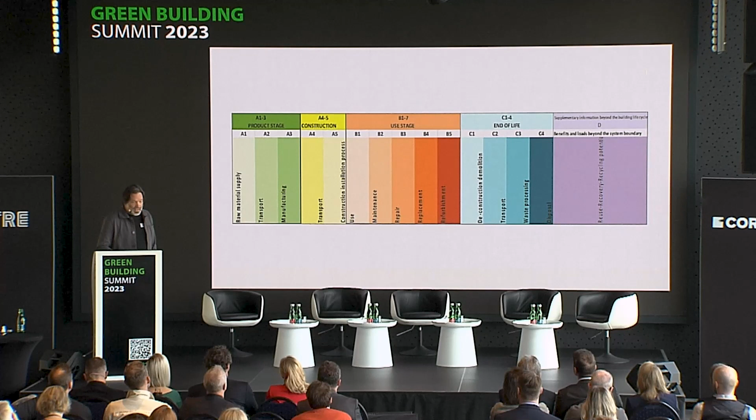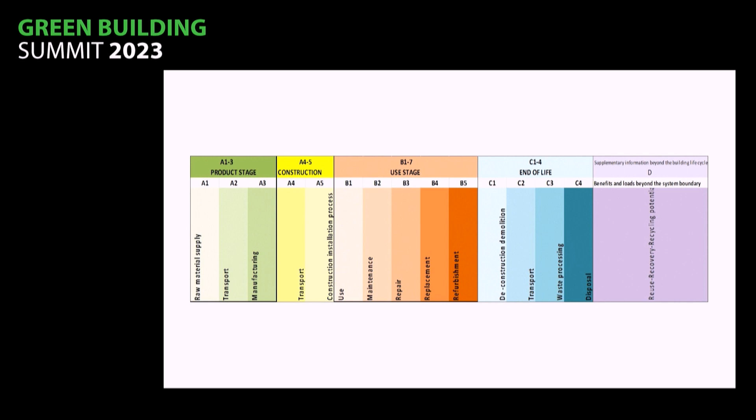You're probably aware that especially in Central Europe or Western Europe, in Austria, Germany, Switzerland, for the last 30 years we have been very good at calculating and improving the performance of our buildings in terms of operative energy consumption. So passive house buildings, really exceptional numbers with 25 centimeters of insulation material that is probably fossil-based, with constructions, with building services, mechanical ventilation services that eat up 30-35% of our building budgets just to improve this part, the use stage of the building.

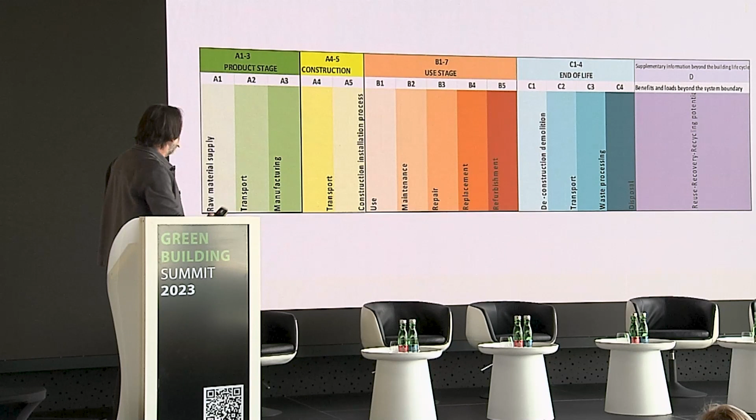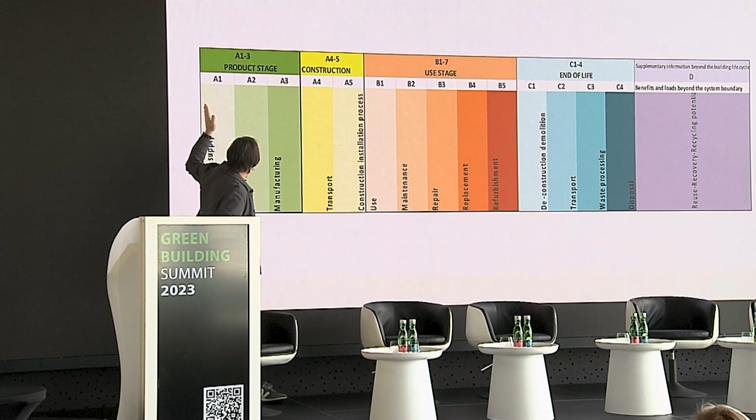We have fantastic numbers, but it's only a part of the picture. And what I really want to talk about today is what is happening before and after this use stage. Because in many construction projects, we see that this A1 to A5 stage, going all the way from raw material supply to transport, to manufacturing, again to transport to the construction site, and construction site installation, can easily eat up more than 50% of your total CO2 budget. Easily 50%. And widening the perspective of the calculation, not only to operational CO2 consumption, but to this whole life cycle, this is super important.

We got aware of this topic about 15 years ago. We tried to really understand what was necessary to address it, and like so often, it was actually refurbishment projects that were the first ones we tried to tackle this mathematical exercise of being truly CO2 negative in the whole life cycle. So these are a series of office buildings in an area close to Oslo, typical concrete slab office buildings from the 1970s, very poor facade quality, very low floor-to-ceiling height, all those situations we have to deal with when working with old building substance.

What we did, we stripped the building, we completely changed the ventilation system. We introduced, really challenging the code with this project, a very low-speed airflow system, so we don't have any ventilation ducts. The ventilation goes through this central open staircase. We have open floor plans, but of course we cannot provide fresh air to individual cell offices, which has an impact not only on the design of the building but also on the culture of working together in these sort of buildings. So you have to accept that with open floor plans, you can have more innovative ventilation strategies.

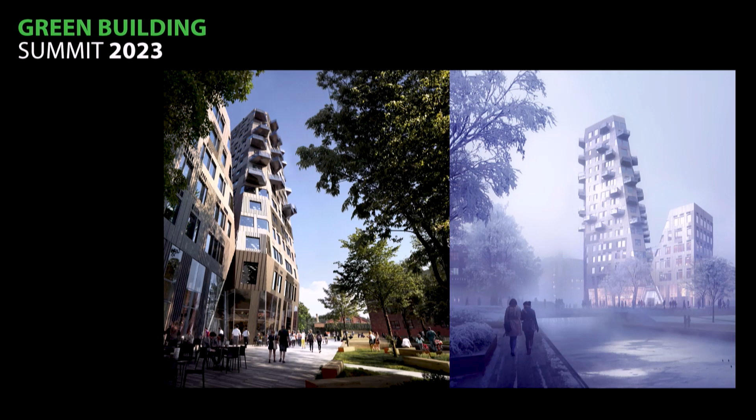Another project from Norway that I would like to make you aware of is called Gullhaugtorg. It's a mixed-use developer project. We have 2 stories of retail and gastronomy, 4 stories of office use, and then residential on top.

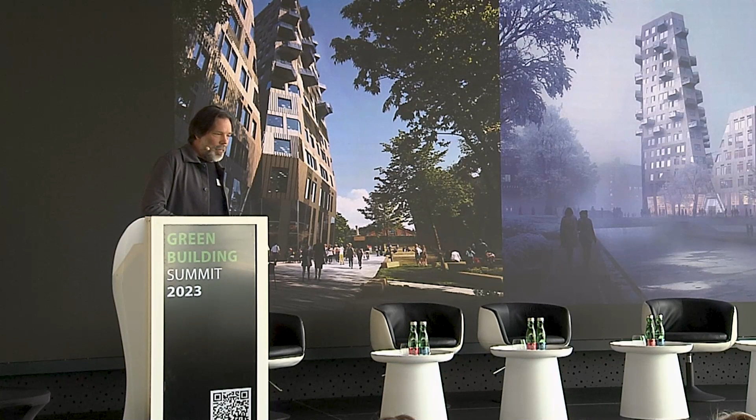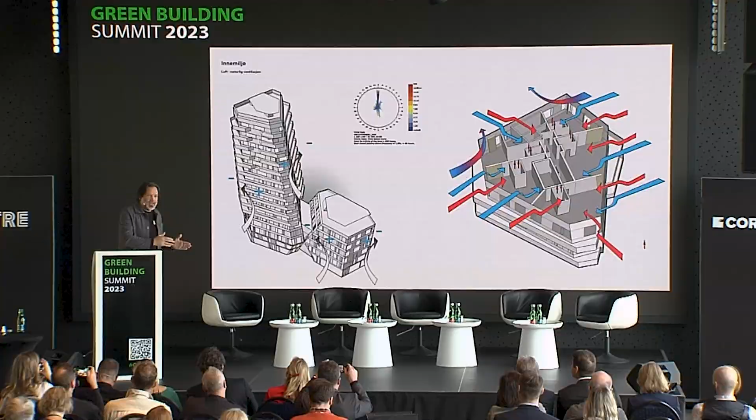What's interesting about this building, similarly to the renovation project for the first powerhouse, is that we're working only with natural ventilation. This is an exercise you need to investigate closely. Do you have energy losses through the use of only natural ventilation? Any building mechanics engineer will tell you, oh, you have these energy losses in winter. But you have to do the whole calculation, and sometimes ventilation systems consume energy. You increase the floor-to-ceiling height, you increase the building volume. So there's a lot of parameters that go into this calculation.

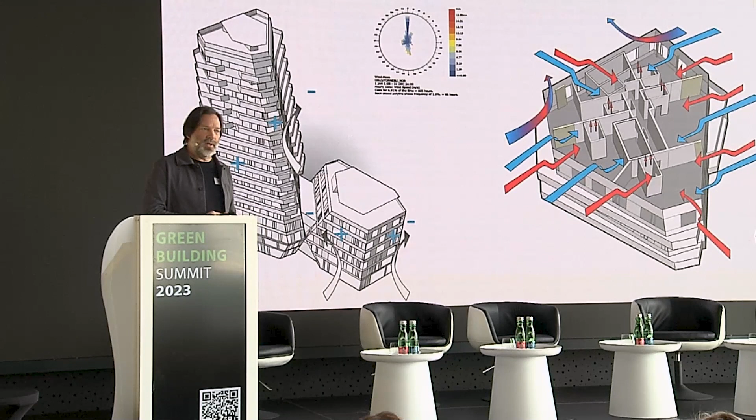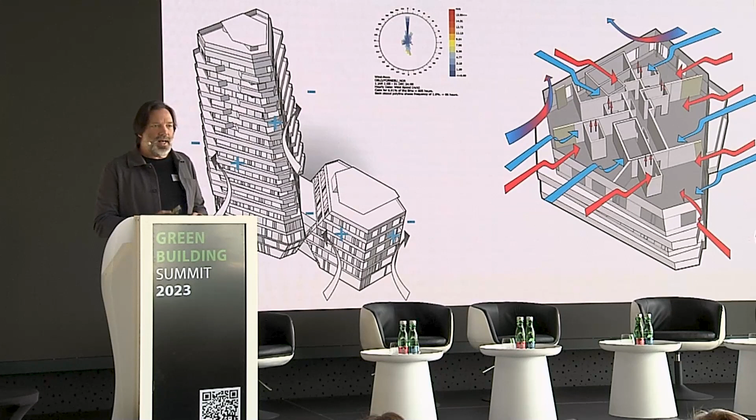What we did in this project is try to use the drivers from the environmental context, the situation of the wind on this specific site and the solar gains present, to influence the building geometry. Similarly to the Powerhouse Telemark project where the size of the roof determined the geometry, here it's the wind direction that helps us naturally ventilate the building and creates this kind of awkward hexagonal shape on the building footprint, again to create ventilation improvements.

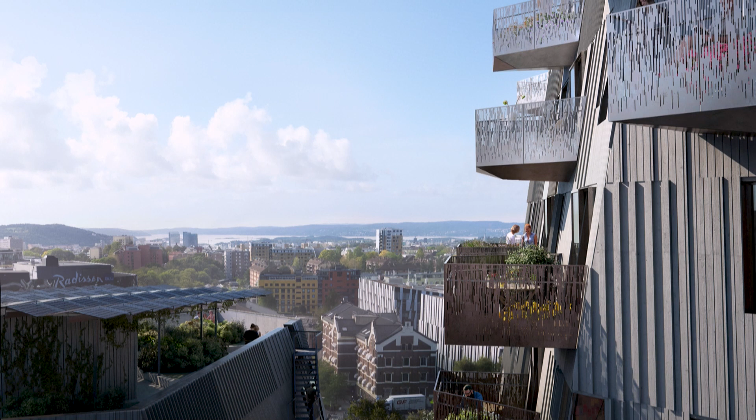For this building, the structure is not in timber because in Norway currently you cannot build a tower in timber. This is really an interesting situation. 60 kilometers from here in Aspern, we have a tower 80 meters tall built in timber, which is currently totally unthinkable here in Slovakia. I don't know why this fire burned differently in Austria than it does here in Slovakia. What is the reason for that?

Also here in Norway, it was not allowed to use timber for the main structure of the building, but for the facade we have a timber solution. And of course, like in the earlier projects, it's not only about the functionality of the building, it's also about the social context it provides. It's now under construction and will be opened this fall.

I'm going to show you another little prototype. That's why we call the lecture Creating Prototypes, because in smaller projects with private clients who dare to challenge the code, you can have a qualified discussion and really ask questions that go beyond the norm. This is an office building for a thriving company close to Innsbruck, where we have our Austrian branch office. An office space for 65 employees, a 4-story building, completely constructed in timber. As an introduction, I'll show you a little video.

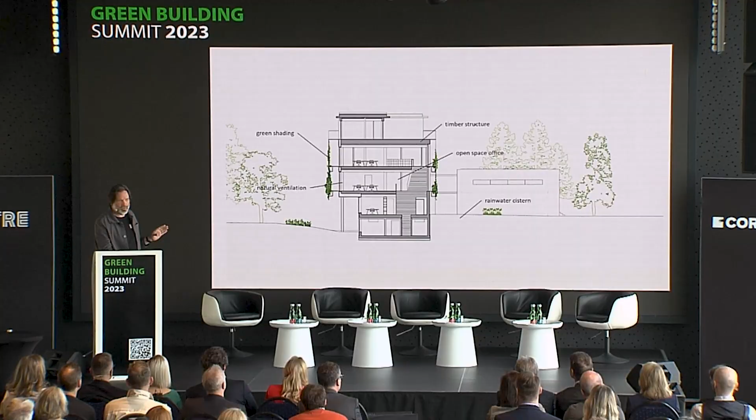So this is a very schematic section of the building, and all you see here is totally not rocket science. It's just a collection of small measures that in total improve the overall quality of the building. So what have we done? It's a timber structure, even with a concrete core and a concrete basement.

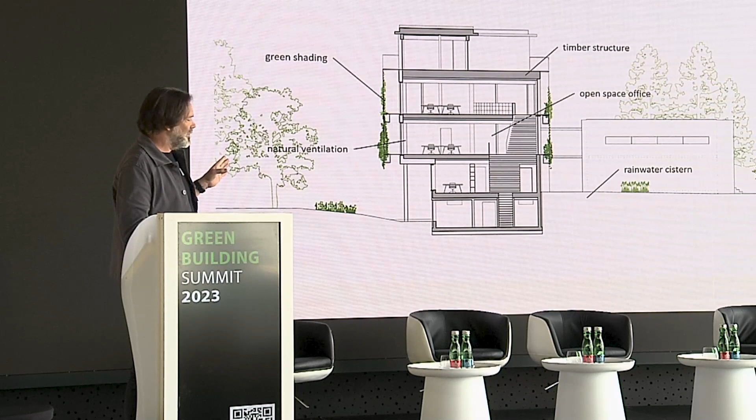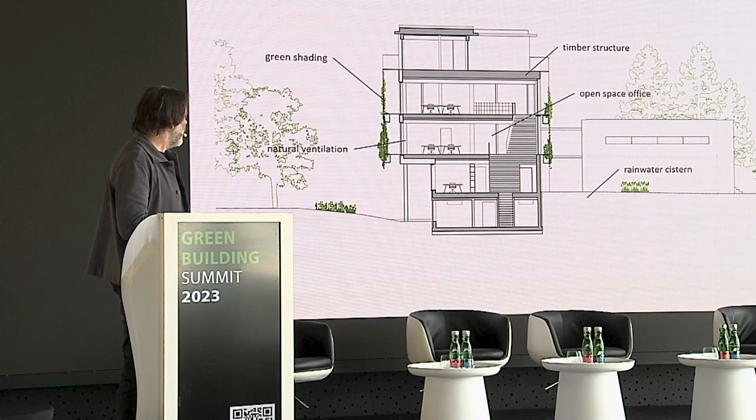We have a rather innovative west-facing facade which is fully glazed, which you'd think is impossible, but because we have this green shading device that I'll show in a bit more detail, it actually works really well for the passive strategies of the building. We have a rainwater cistern that waters the plants on the facades, and so on. We have open space office, and again we're using this topic of natural ventilation, which not dogmatically is better, but in some situations it can provide a really interesting solution.

Once you enter the building, I think it's rather humble from the outside. You don't see a lot, but on the inside, I have to say it's great. Every time I go there, it smells well, the people are nice, you look into nature, you have a lot of nature inside, the omnipresent amount of timber. I am surprised over and over again that it's not like an Almhütte, as some of you may understand the terminology. It does not feel like that. It feels super modern and super comfortable. I think it really represents the idea of how sustainability can improve the atmosphere and working quality of your building.

It's an open space office, so all 65 employees sit in one open space. There's no doors between the workplaces, which is the horror for many people when they're told they're going to be in an open space office. But you don't actually notice that you're in an open space, because we have grouped the people and put meeting rooms in between, but in general it's one open plan.

We also have three-dimensional openings. We have a very low floor-to-ceiling height, under the beam it's 2.4 meters, totally unacceptable for some real estate developers. You say you have 2.40 meters, yeah, but we can do this because we are modulating the height. We have some really open areas where we have two-story openings.

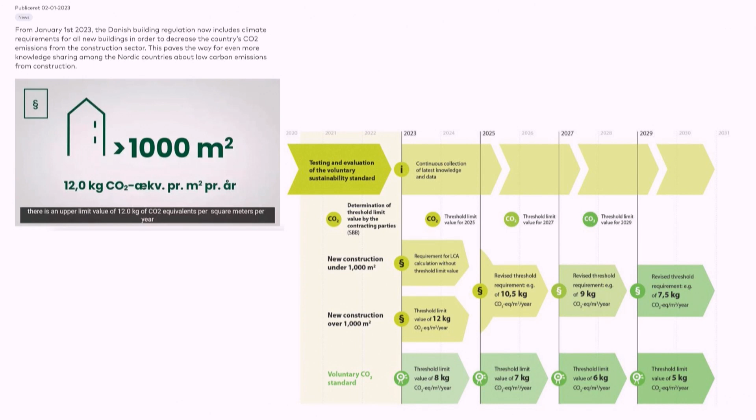And why am I saying this? Because we need to know what we're doing in order to improve. And nobody currently in Europe actually knows in detail - we can talk about reducing our CO2 footprint, but most people don't know how to calculate it. We don't even get the numbers from the industry. This is something we need to change, and something that will change.

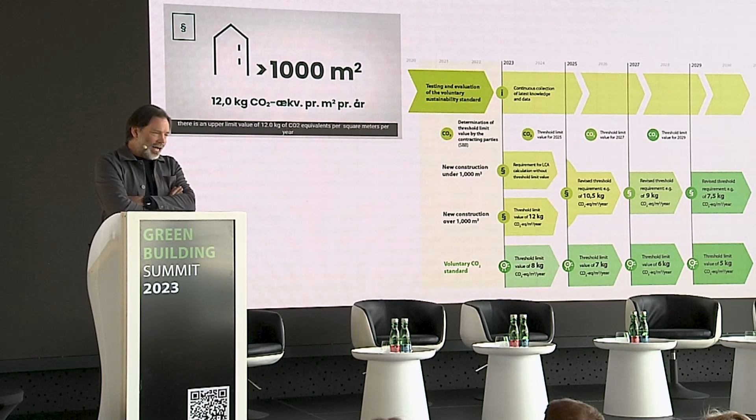So for example, in Denmark - and I'm so happy that Schmidt-Hammer-Lassen will talk about this today - there is now a regulation for these numbers. I think it's very interesting: the country of Denmark is saying you have a hard limit to how much CO2 you're allowed to emit in the life cycle stage of the building.

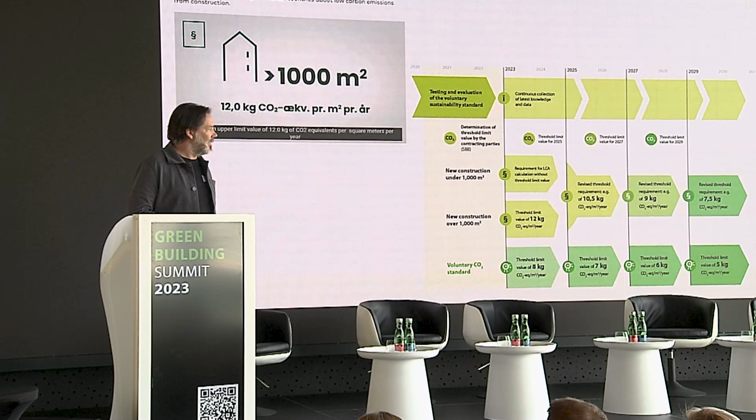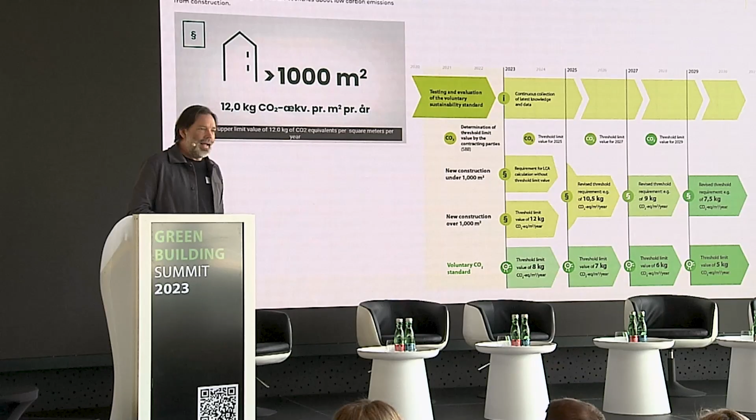It's a 50-year calculation, a number which is 12 kilograms CO2 equivalent per square meter of GFA per year. We'll have to get used to these numbers because Denmark is not going to be the only country in Europe doing this. Now the Netherlands are starting to prepare for this too, and with EU taxonomy regulations, this will spread throughout Europe. If I ask around my colleagues in Austria, everybody's talking about sustainability, but nobody knows how to calculate these numbers.

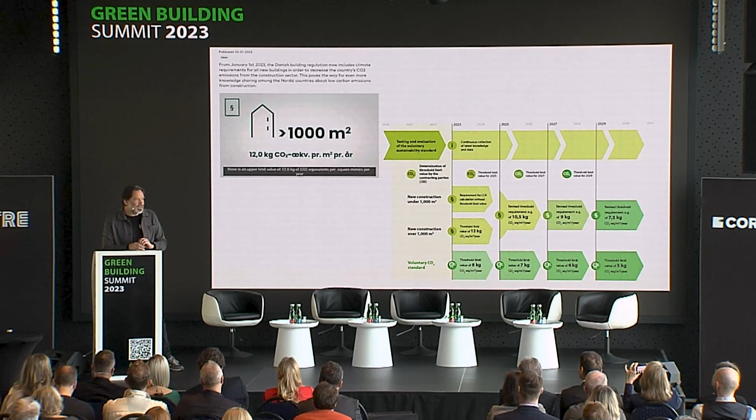So I think by introducing hard limits, we all will need to be aware of the numbers. We will understand, is 12 kilos ambitious, or mediocre, or nothing? Currently I don't even know. But in 3 years, when we meet here next time, you'll say, oh, we did the last project with 5 - wow, that's fantastic. Everybody always knows about cost: oh, how much did your office building cost? 2,350 euros per square meter. Oh, that's a lot, we did the last one for 1,800. We all know that, our clients know, the municipalities know. But with CO2 emissions, we all just have the blah blah. So I really think this is so important, to get our heads into those numbers.

And I really have to say, I love concrete. I'm an Austrian architect, we're close to Vorarlberg, close to Switzerland - they love concrete. It's a fantastic building material, but it's a real problem because Portland cement and the use of concrete is responsible for more than 8% of global CO2 emissions. It's crazy, it's more than transport. We can talk about electric cars for a long time, but nobody talks about... well, some people talk about concrete. We need to talk about concrete more.

We need replacement strategies to reduce the CO2 impact of concrete. And that's where I sometimes think we need to almost go beyond the life cycle assessment and think about life cycle 50 years from now - that's 2073. The planet, if we don't act now, is going to have a real problem in 2073. So like I say, life cycle calculation is a good thing we're doing, but we need to reduce emitting CO2 right now.

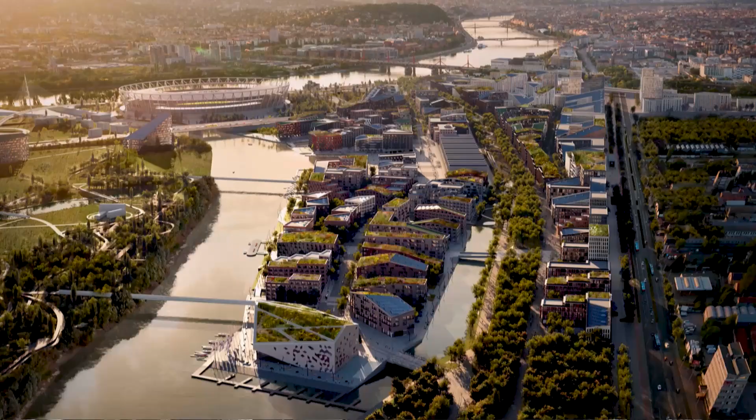So that's why we really have to reduce the use of concrete. What can we do about it? We can even try to refuse the use of concrete. I'll show you one example: this is the Budapest master plan that's been talked about briefly today. It's a big real estate development in the city of Budapest - mostly student housing, some office facilities, some communal facilities, some existing structures. Here in the center you see an old market hall that really gives the space a good atmosphere.

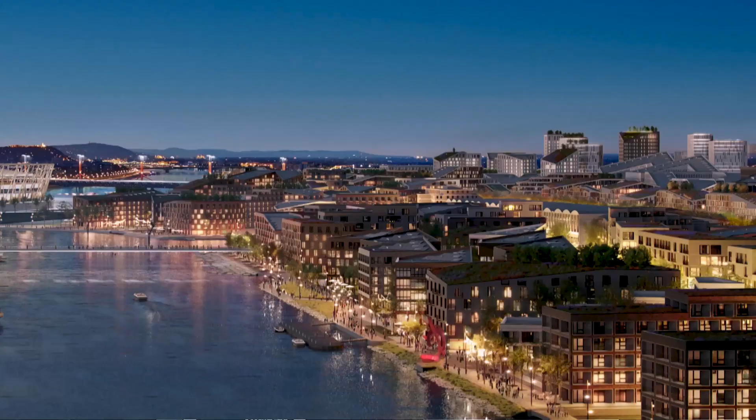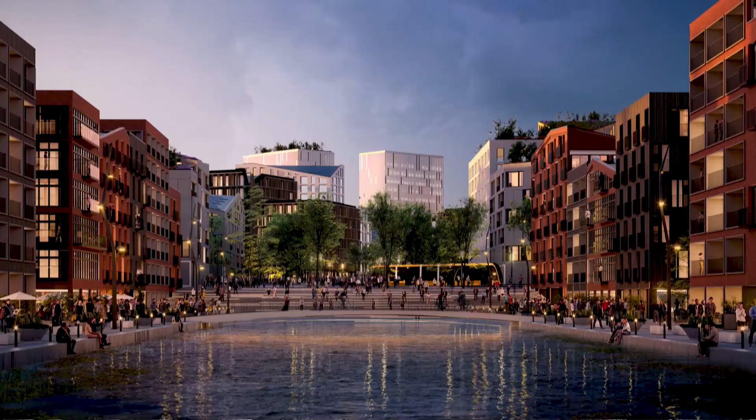What we did for the project is we reintroduced a feeling of being in contact with the water. In Budapest you have a few boats, but in general the Danube is not accessible. On both banks there are tramways, cars, and fences, and a naturally, artificially regulated bank - nobody is actually in touch with the water. This part of Budapest is not on the actual Danube - you see the Danube in the back, but here there's a canal which is regulated, already a very old canal. Here the water table is quite stable, so people actually have the possibility to interact with the water, with all the qualities that brings - evaporative cooling, atmospheric qualities.

You can introduce a lot of planting, and we were very aware of all these topics of blue and green infrastructure - I hope somebody will be talking about this today. It's the way you deal with water in your city quarters, not putting it into the sewage system, but using the water very actively with open retention areas, a hybrid between functional environmental systems and recreational areas.

But what we also did in this project, together with the client - the municipality - is develop a mobility strategy in order to completely avoid underground structures. Because the problem with concrete is that for above-ground structures we have solutions currently mostly regulated by problems with code, but we can build, like I said, an 80-meter tall building in timber - no problem.

We have challenges with regulation, challenges with the building industry that needs to change. But below ground, we're still stuck - we need concrete. So what can we do? We can change the mobility behavior. For this project, we suggested a series of parking houses on the perimeter of the site, and the whole site is only accessed by pedestrians. So this is what you get: public transport, people, vegetation, and a very vibrant urban quality.

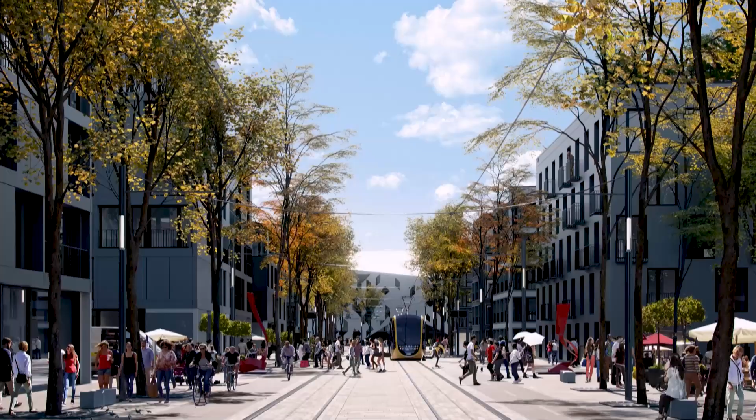So this one is about reducing the use of concrete. Please challenge your structural engineers. Normally, if he tells you it's going to be a 24-centimeter slab, most likely you can go with 18 or 16 - it's just that they're lazy. I really have to say that, sorry, I hope no structural engineers are here.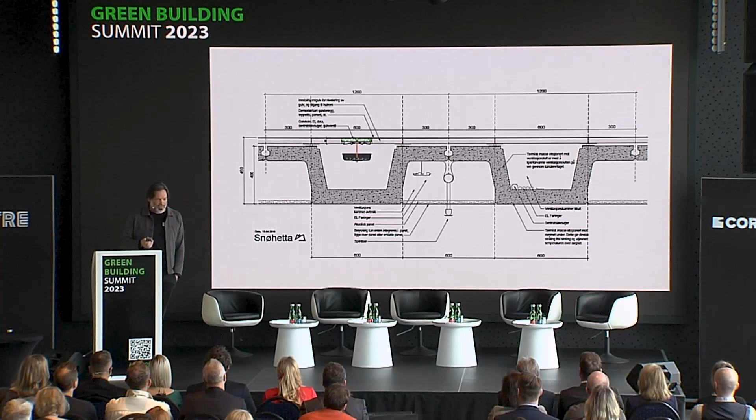We have, for example, developed a slab system that is this kind of trapezoid, like a corrugated metal sheet, but it's made of concrete, where we have all the technical installations embedded, and we can reduce the amount of concrete by 40%. So if we have to use concrete, you have to be smart and challenge your engineer and maybe invent new solutions. We can remix.

We can't, but we can get involved. So geopolymer concretes will hopefully play an important role, and actually what I'm really hoping for is that they develop really quickly, and that in 20 years' time we actually have concrete that does not emit CO2 on an industrial scale, and that we can then again use concrete, but currently we're not there.

So we're involved in a project called Safe Rock. It's a research project that is really thoroughly investigating the use of geopolymers for substituting Portland cement in concrete mixes.

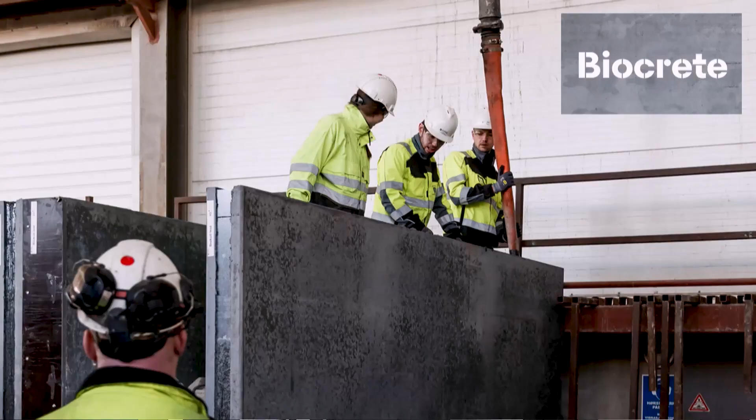What can you also do? You can try to capture, so retard. We're also involved in a project called Biocrete, where we use char to capture carbon in the concrete, which makes it CO2 neutral. The performance of the concrete is currently still rather poor, so you can only use it for low demand purposes, but there are different strategies around the world that use different ways of capturing carbon in concrete, so I think this is also very interesting, but again, we need to challenge the industry.

But the most reasonable way to go right now, I think, is replacing. We need to replace concrete. And we can do so through timber, which I've shown. We can also think about other construction materials like rammed earth.

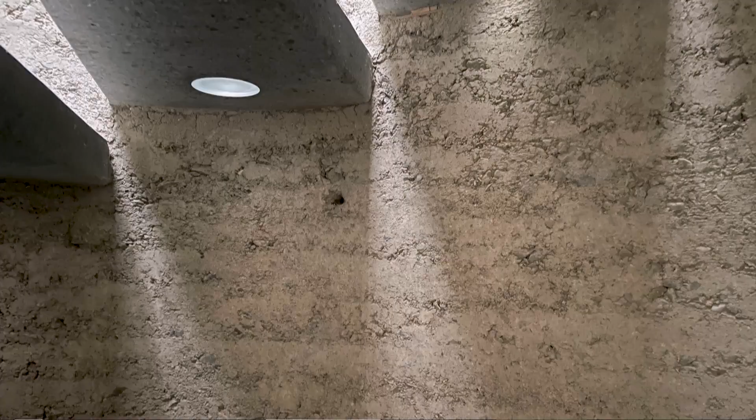We're in close contact with a company called Lehm Ton Erde, Martin Rauch - maybe some of you have heard about them - and they have gone from small boutique projects now really into an industrial scale where they are investigating the use of rammed earth for commercial building projects.

So they can do 3-story residential projects with 35-centimeter pre-rammed earth elements that are produced either on site or in their production facility in Vorarlberg, shipped to the location and then put up. But of course, this is also something where we need to challenge code, where we need to challenge clients. Currently the construction cost in building with rammed earth is more expensive, obviously, but these are things that need to change. So we have a project in Switzerland here.

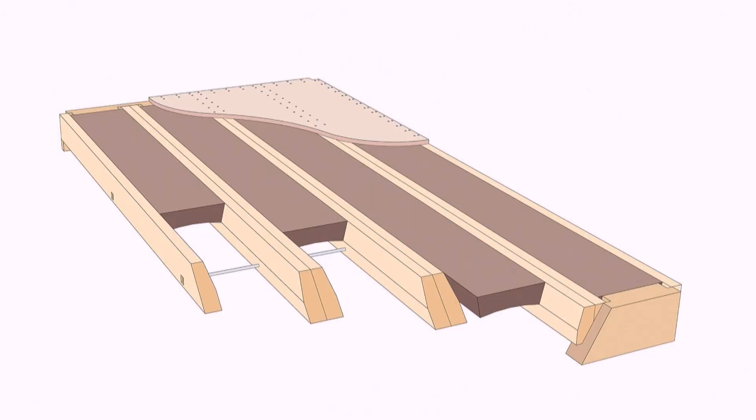I have not shown this ever. This is a school, a boarding school for international students in the town of Gstaad, where we use a timber structure. And in this one, we're really investigating thoroughly the use of timber-rammed earth hybrid ceiling systems. It's not something we invented - it's actually Herzog & de Meuron who spent a lot of money and energy into this system.

I think it's so beautiful, it's absolutely fantastic. It's only compression on the rammed earth element. The rammed earth has no reinforcement whatsoever - there's no artificial reinforcement like carbon fiber or steel, and there's no natural reinforcement like straw. But because it's under compression, we know that there are only compressive forces, and it works.

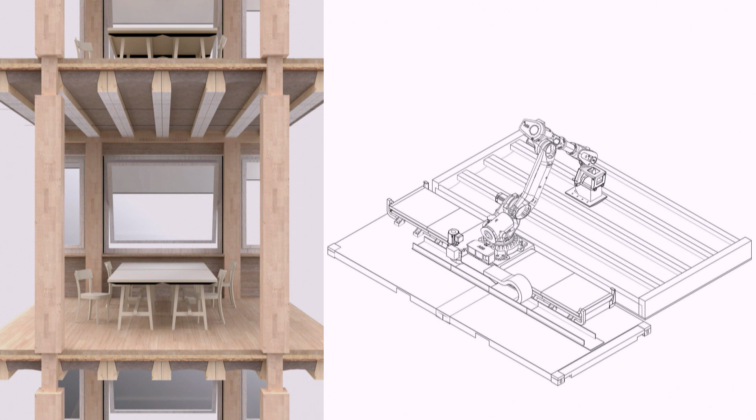So the span of the rammed earth element is only about 80 centimeters, so they're not huge fields - there's still a lot of timber involved. But what we can do is we have thermal mass, we have good acoustic properties, we have good hygroscopic qualities for the air. And it's somehow funny because it's this hybrid between super low tech, using excavation material from your construction site, but at the same time using high tech like this ramming robot in order to be efficient and do this on an industrial scale.

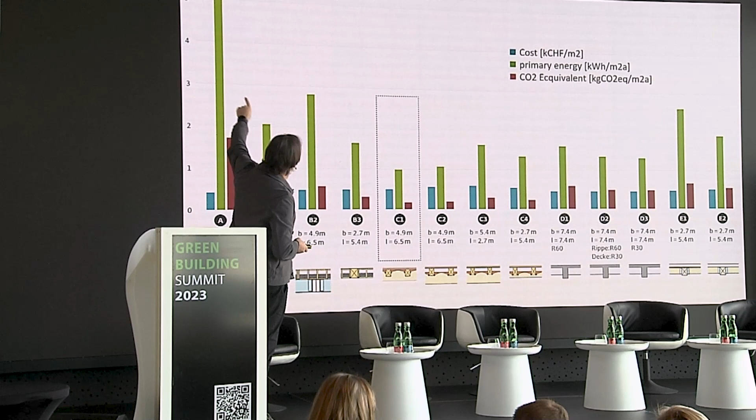And the numbers are just fantastic. If you compare the primary energy use, we're down to a quarter from a typical concrete slab. Cost is a bit higher, but if you compare the relationship of use of primary energy to the increasing cost, this should be negligible.

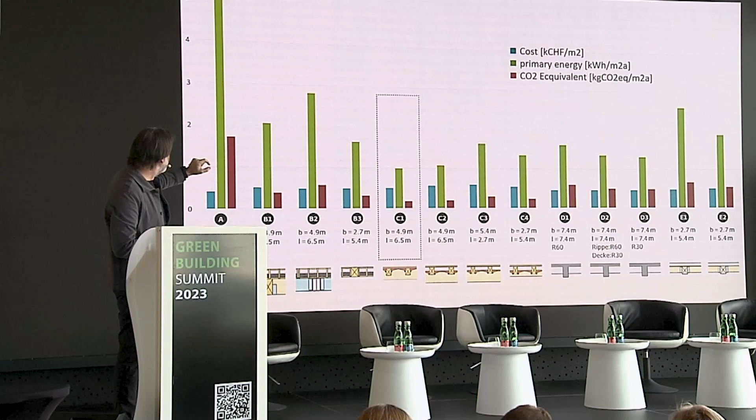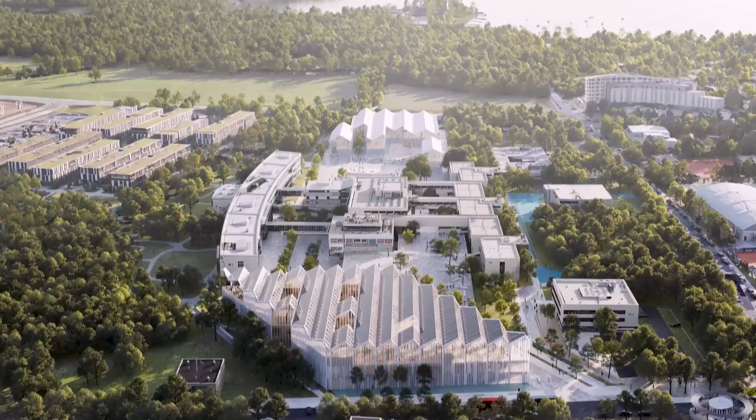Other projects we're currently working on, you can see a university project. It's an existing university in the town of Klagenfurt in southern Austria. We won the competition for this extension. I think it relates well to this idea of how your general conception of a building has an impact on its environmental performance.

In the competition brief, here you can see the lake in the back, Wörthersee, which is only about half a kilometer away, and the director had this idea of making a tower so that from the rooftop you could have your Aperol looking down to the lake.

What we thought, going back to the Opera House in Oslo and other buildings where we've realized spaces for interaction, we think a horizontal building is much more appropriate for a university. We don't have 12 compartments where people are isolated and maybe they meet in the elevator lobby. We think a university building needs to be about exchange of ideas and knowledge.

So we made this very horizontal building with the effect that we have a large roof surface where we get daylight from the north and produce huge amounts of electricity with the south-facing elements of the roof. All the building is actually a huge flat timber structure with a shed roof on top and a space where people can meet. Finally, I'm almost finished with my lecture.

I want to talk about the project, which is about 6-7 minutes away from here. It's a real estate development, a huge plot. It's a super interesting project when we discuss aspects of how urban design and strategies of urban planning influence our built environment and our future of living in cities.